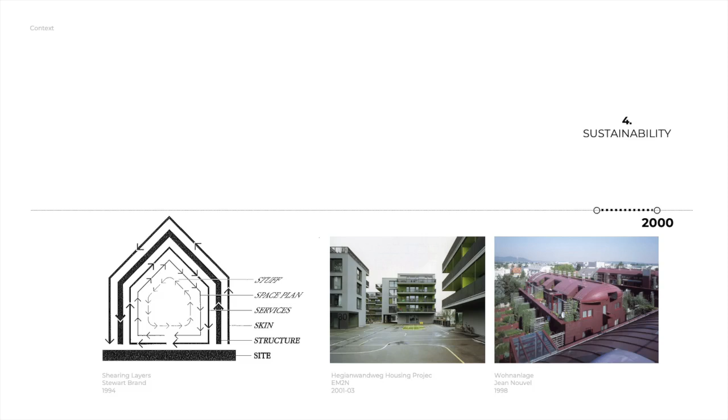So, when it hits the 21st century, there is a 4th episode which clearly reflects an evolutionary logic observed through the previous century. On one side, the experimentation of modernism and collective housing influences the new housing models, such as co-housing, with a horizon in response to urban, economic and social challenges.

On the other side, there is an evolution of technology providing the development of production and manufacturing systems and methods that favor the flexibility of buildings. Principles such as design for disassembly, design for adaptability, material passport, standardization, or modularity are some of the topics identified as the main drivers of flexibility in construction today.

Just as architecture and the flexibilities of space have followed the changes and needs of society over the last decades, it's now our goal to understand today's society in order to know which logics will best adapt to their needs. Today, we are surrounded by uncertainty.

We live increasingly faster, without space, without time. From a social point of view, with the constant growth of population, daily migrations of different scales and contexts, cultural demands or personal preferences, or from an economic point of view, with the unpredictable variations of market values, or even the undeniable climate emergency, the quest for global sustainability and technical demands requires a change in our building design culture, in order to adopt a new vision in which buildings are flexible to deal with different variables through their useful life. In this evolutionary logic, the main goal of this research is to propose an alternative scenario that could be an alternative to the current housing models.

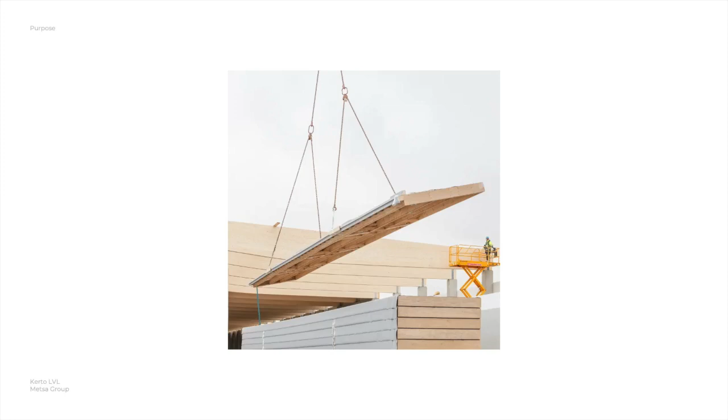However, a change in the raw material is not enough given that much of the pollution caused by construction is related to the tons of construction and demolition waste generated by premature and arbitrary demolition practices. This predominant end-of-life option for buildings and their components is a result of a linear production model used by most of construction companies.

New building concepts should be promoted in the future that can be redesigned, upgraded or disassembled without generating waste. Prefabrication and modularity were important in the history of architecture for understanding these methods of implementing and improving them, simplifying the process of disassembling at the end of the building's life cycle.

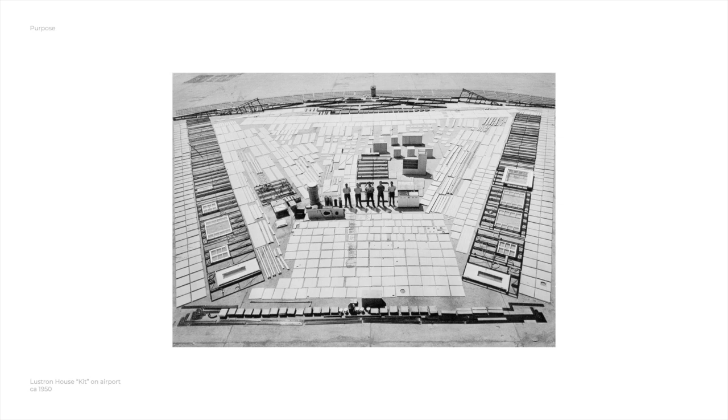So the combination of these two issues once again proves to be complementary. On one hand, adapting the living conditions of spaces to today's society will allow us to extend the useful life of a building, delaying what could be its earlier demolition. On the other hand, by taking advantage of the technical adaptability that prefabricated and modular solutions, especially using wood, allow, it will be possible to create different spatial solutions from conventional models.

In other words, the aim is to introduce flexible spatial logics in the principles of modular construction, which are often associated with more rigid and compartmentalized programs, and introduce the constructive logics of disassembly and malleability of modular construction components into conventional linear models often used in residential construction.

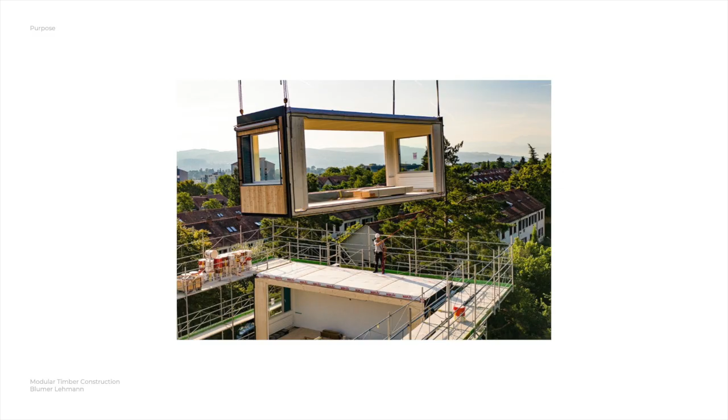With this, we are not promoting a miracle solution that aims to solve all the problems of construction, specifically in the housing sector, but instead to develop an alternative solution among several possible ones.

In order to limit our scope of analysis, we will focus on the Portuguese context. Despite the fact that timber construction had an important tradition in Portugal until the 20th century, it was fundamentally based on mixed construction processes and was rarely used as an integral solution.

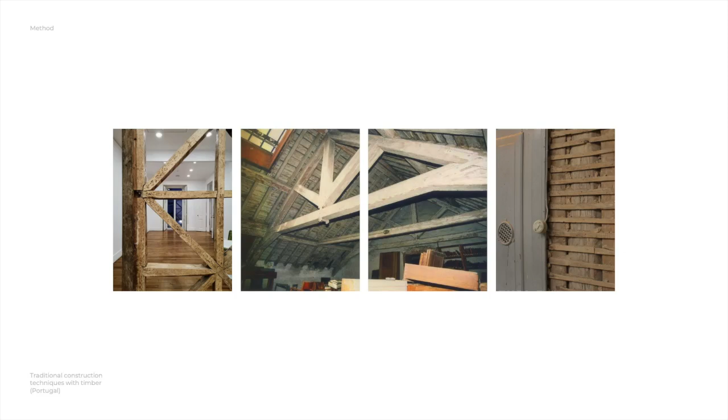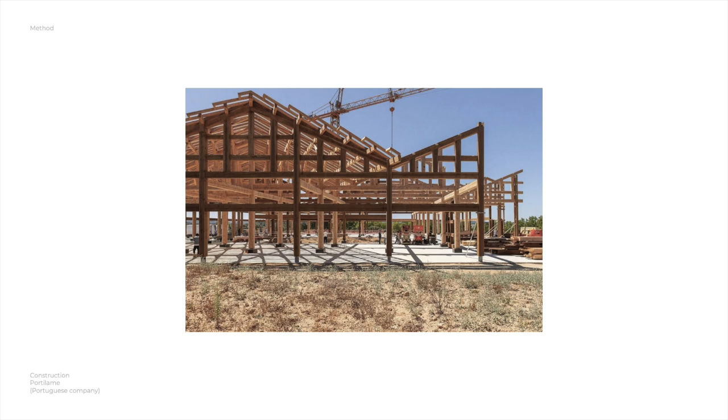Today, despite being a sector characterized by the development of micro-enterprises, recent development shows signs of growth, and a considerable increase in supply and marketing is expected in the coming years, which reveals the relevance and need for research in the same direction. In order to complement the existing information about the wood production and marketing industry in Portugal,

one of the first goals of the research was to develop a questionnaire addressed to companies with the aim of analyzing and identifying how the industrialization of modular wood systems could be an alternative to the actual challenges and needs of housing in Portugal. Some of the questions we intend to answer are the main systems and types of wood used, origin of these woods, current applications, scale of operation, barriers, among others.

Despite the fact that we don't have concrete data, given that the quiz is still open, based on other similar studies that have already been carried out, it's possible to anticipate the ability to develop this sector in Portugal, although there are some barriers. These include the lack of knowledge and experience in modular construction, the need to implement public training courses, and the integration of research institutions in the development of proposals.

On this last point, there are some projects underway at the moment, such as R2U Technologies Modular System, of which I am a member, a cluster specializing in prefabrication and modular construction that will stand out as a national response, positioning Portugal as a globally prominent supplier in this new approach to the construction industry.

Another common denominator cited by the main companies is the need for government intervention and the promotion of these methods in public projects. Understanding the capacity of companies in the sector to develop new solutions, it is therefore necessary to understand what type of housing is currently being designed in Portugal.

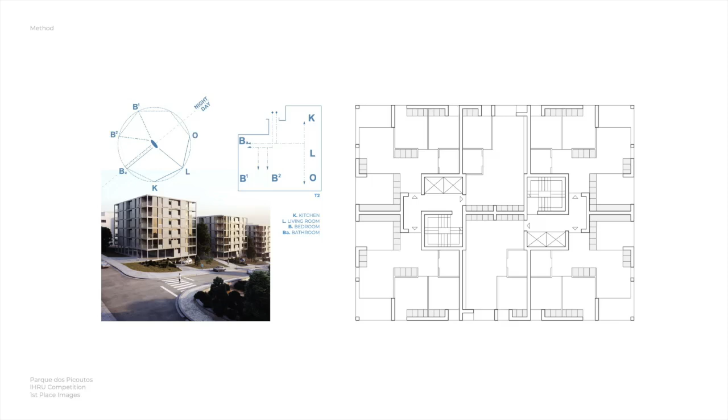In this specific case, and indeed in most cases, we can see that there is a clear division between night and day spaces, with the connecting link being the entrance hall or circulation. Observing the jury report, we can see that this type of spatial layout is almost always a requirement in the preliminary program.

There is also an analysis of the proposal's capacity for spatial flexibility and adaptability according to the categories in the book Flexible Housing. Also, the project's construction profiles and descriptions are analyzed in order to understand its characteristics. Despite the fact that this study is still in development phase, some conclusions can already be drawn.

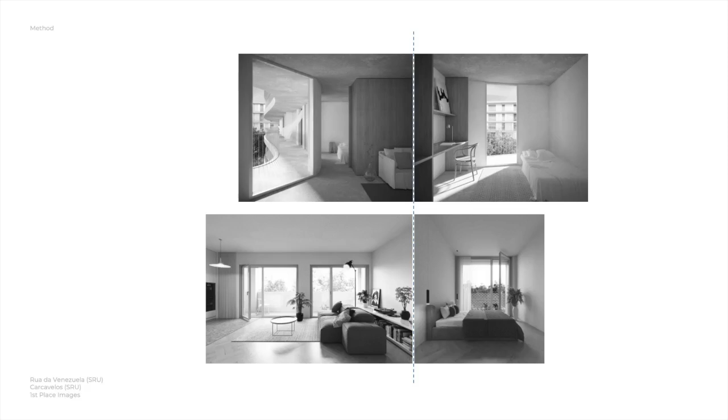It remains a model based on conventional spatial matrices based on rigid compartmentation, built on an ideology taken over from the traditional family of the 20th century. There's still a division between daytime and nighttime activities, creating spaces that are intentionally disconnected from each other, with the main connecting element being an uncharacteristic space, in most cases a corridor with no possibility for any kind of occupation.

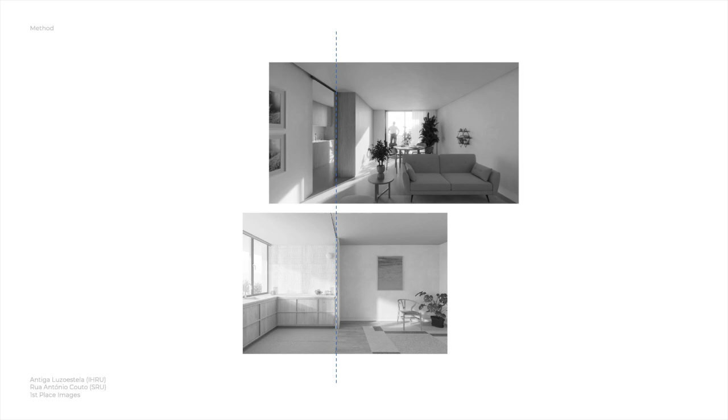In terms of spatial flexibility, only around 20% of the proposals have some kind of flexibility, and most of which are sliding or folding panels that separate the kitchen from the living room.

In terms of construction, it can be seen that linear solutions based on structural resources like concrete or brick remain. Despite this, there are some signs of a paradigm shift with the recurrent introduction of prefabricated facade systems or the appearance of modular bedroom solutions in some cases, which shows a likeness of part of competitors to bet on solutions that allow for greater savings in resources and faster implementation on site.

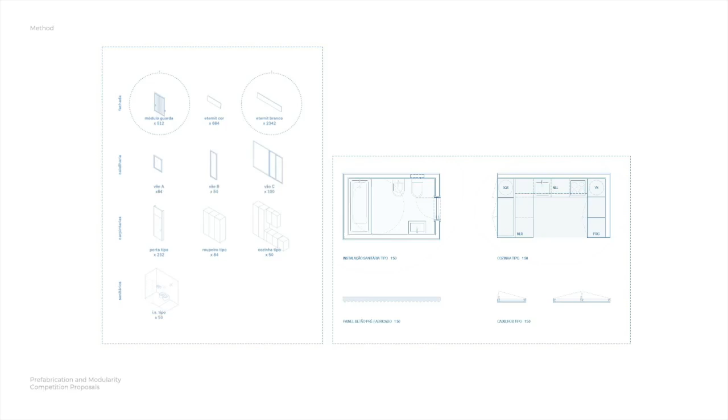There are also no solutions using wood or other natural materials, which demonstrates the need to explore the subject. If we look to countries like Finland, Switzerland, or more recently France, we can easily identify measures that have promoted and even required the use of natural materials such as wood.

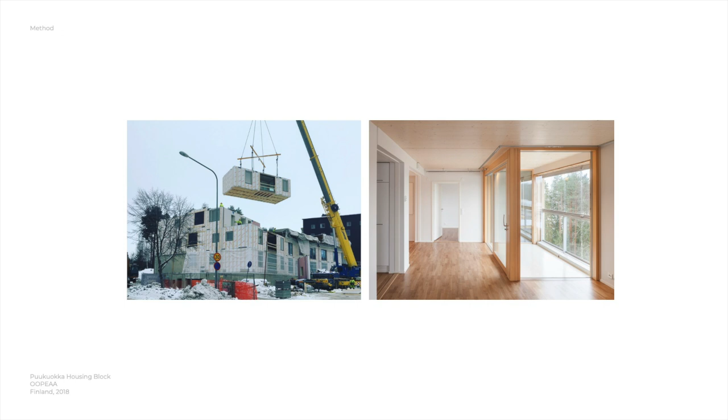It is essential to understand the reasons why these measures have gone backward in Portugal. We often associate the difficulty of implementing new measures and new systems with the change that this implies in conventional models, where an entire sector is already oriented in a certain direction.

So this is a work in progress, so the next goals of research will be to understand which of the building systems commonly used in timber structures is best suited to the current state of the industry in Portugal. For that, it will be necessary to get feedback from the companies in the form mentioned earlier.

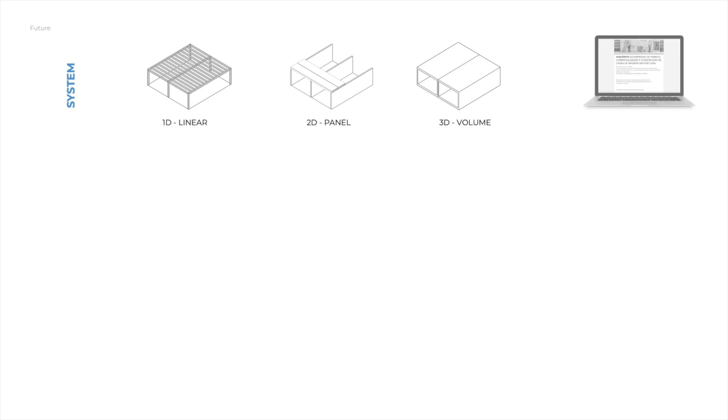After that, it will be necessary to define a basis. This basis will result from interpreting the most common metrics used in analyzing the competitions, because despite the fact that this is a new proposal, it must be based on existing models in order to be applicable in the current reality. On this basis, it will be necessary to understand how the system, its components and connections can respond to the different types of flexibility imposed by the living models of today's society.

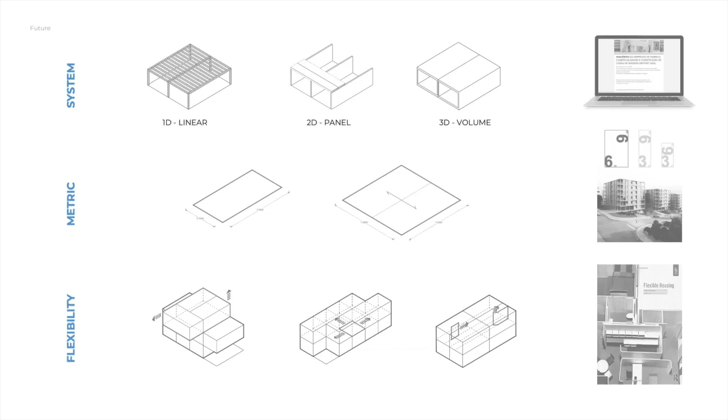Talking about connections, just like Gropius, Wachsmann and many other figures through history have tried solutions that, for many reasons, have not been as successful as they hoped, maybe now it's the time to try a new approach.

With technological advances and the increasing need for sustainable and adaptable housing solutions, modular timber construction has emerged as a promising opportunity. Through this research, we aim not only to explore the potential of this technique, but also to inspire transformation in the way we design and live our spaces, creating a flexible, sustainable, and innovative architecture.